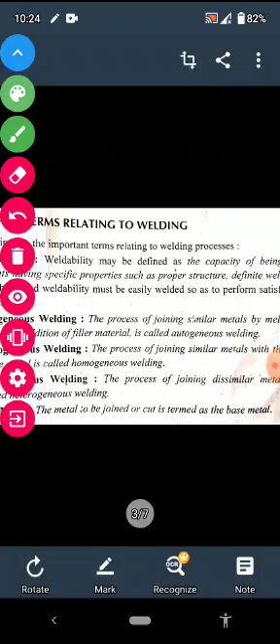So the joints made by the welding process should have a definite proper structure and definite welding strength.

So a metal which has good weldability is one which can be easily welded so as to perform satisfactorily in the fabricated structure.

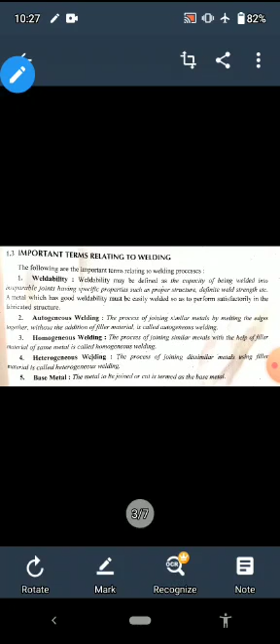Next definition is base metal. The metal to be joined, the metal which we want to weld, is known as base metal.

Next topic we will discuss is the classification of welding processes. As you can see on the screen, the very important first type is gas welding. These welding processes are basically classified depending upon the source of heat.

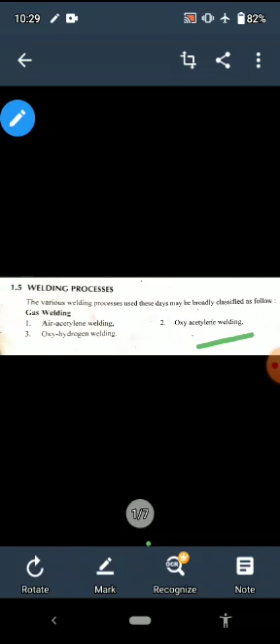The third type is oxyhydrogen welding. As the name indicates, we are using hydrogen gas in combination with oxygen to do the welding process.

Now the second category is arc welding. We have shown on the screen that 9 different types of welding are there. The very first is carbon arc welding. Then there is shielded metal arc welding.

This is one of the important second ones, shielded metal arc welding. We commonly use this in our institute workshop also for making welding joints. Then next is flux cored arc welding.

Next is submerged arc welding. Fifth one, very important, TIG welding. TIG stands for tungsten inert gas welding. I am repeating, tungsten inert gas welding, TIG welding, very important.

Next is MIG welding. MIG means metal inert gas welding. These two are modern processes. MIG we are commonly using in the workshop also.

In the paper also, in short type questions, these abbreviations are commonly given and asked what TIG stands for or what MIG stands for. TIG is, I am again repeating, tungsten inert gas welding, and MIG stands for metal inert gas welding.

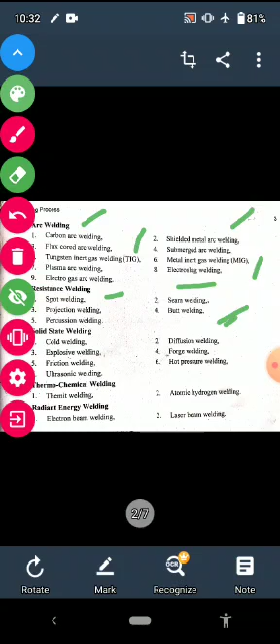Solid state welding - in this we have cold welding.

Diffusion welding, explosive welding, forge welding, friction welding, hot pressure welding, and ultrasonic welding. In this, the fourth one, forge welding, we were commonly using in the old days.

Okay, the next category is thermochemical welding. In this we have 2 types: thermit welding and atomic hydrogen welding.

In the last main category, radiant energy welding, we have 2 important and modern welding processes: electron beam welding (EBW) and laser beam welding (LBW).

Electron beam and laser beam welding - these are the 2 modern processes of welding we are commonly using for industrial purposes.

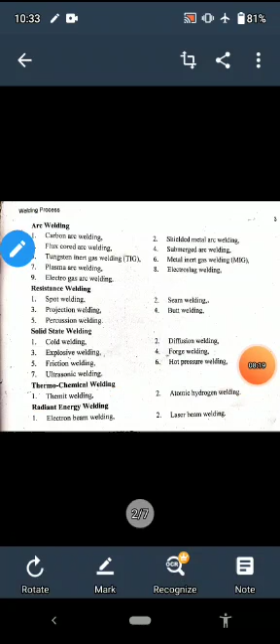So this is regarding the classification of welding processes.

Next we will discuss the welding positions. Welding positions is a topic generally asked in the paper. We have basically 5 welding positions. The first one is in front of you.

First is flat position. As you can see on the screen, depending upon the direction in which the filler material is deposited - on which surface, horizontal or vertical - the welding position is named accordingly.

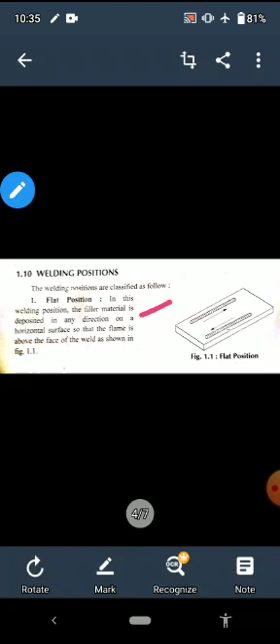As you can see in this figure, flat position means the work pieces are placed on the working table and the filler material is deposited in any direction on a horizontal surface. This is important - whichever direction it is, it should be on the horizontal surface. Then that welding position is known as flat position.

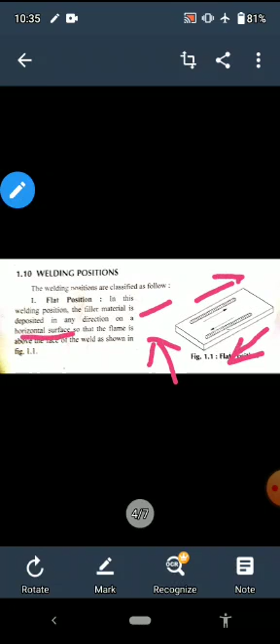Okay, now next we will discuss the horizontal position.

In this position the filler material is deposited on a vertical surface in a horizontal direction. Direction will be horizontal but the surface will be vertical. This is the difference between flat position and horizontal position.

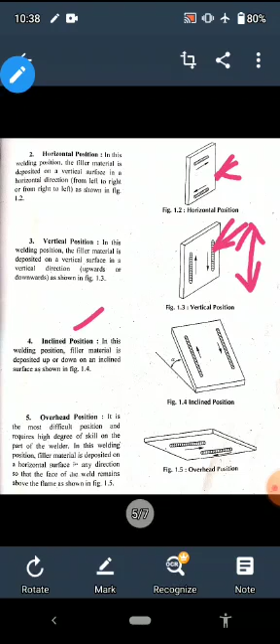So next is the fourth position: inclined position. As you can see, the workpiece is placed at some inclination, at some angle to the horizontal surface - say alpha, as we've shown here - and the filler material is deposited up or down on any inclined surface.